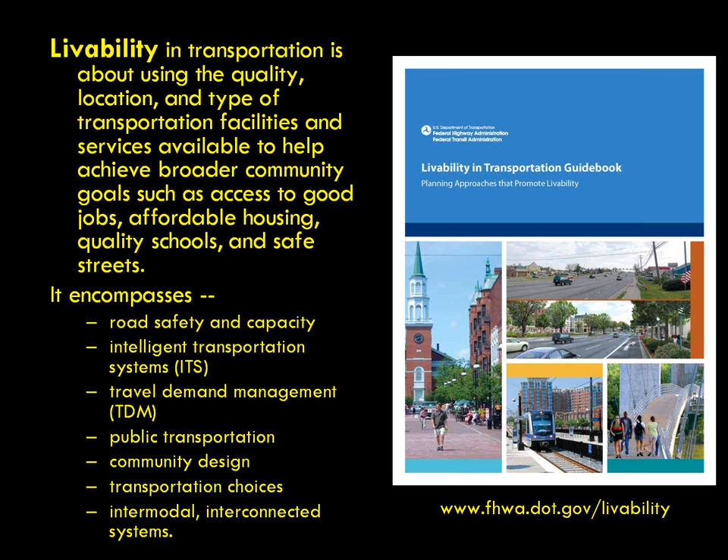This quote is from a guidebook published very recently by Federal Highways that we had a chance to work on along with our consultant partner ICF, to help define and provide case studies and best practices not only for incorporating livability into transportation investments, systems, and plans, but also to address the longer-term issues of sustainability, which, in one definition, you could say is really livability for future generations. This guidebook is just one example of many that are out there being created by transportation-related agencies.

Throughout the administration, many of which are just a sampling seen on your screen, and many of which are being funded by a variety of agencies, including ones that are not coming out of DOT, including EPA and HUD particularly.

I think this is a really golden opportunity for us as planners to integrate our transportation planning, our funding, our sources, our best practices with the larger practice of urban planning, regional planning, rural planning, and really address the whole question of creating communities that people want to live in.

That makes me step back and ask, why do people live in community? What was the purpose of getting together in the first place? I think initially the goal was to survive, and that's still true today. But as our societies have advanced, we also gather in community to thrive.

Transportation needs to help us survive, by providing connections that help us get our basic needs met in a way that supports our health and well-being. But transportation also needs to help us thrive, which has to do with economic well-being, healthy living, and advancing our social, spiritual, and educational goals of life.

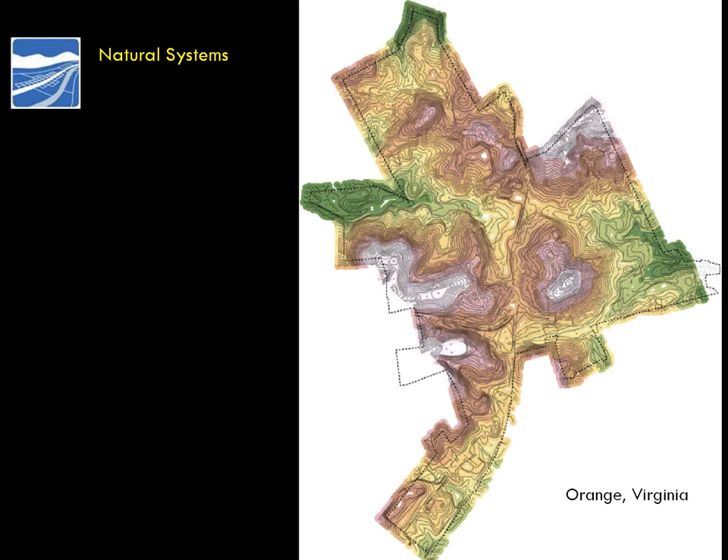Every community is shaped very distinctly by the natural systems, as shown here in the little town of Orange, Virginia, by the transportation systems overlaid over time into canyons, rivers, valleys, and rail lines, and by the settlement patterns that organize themselves around those transportation networks. Where things are most accessible is where development wants to go.

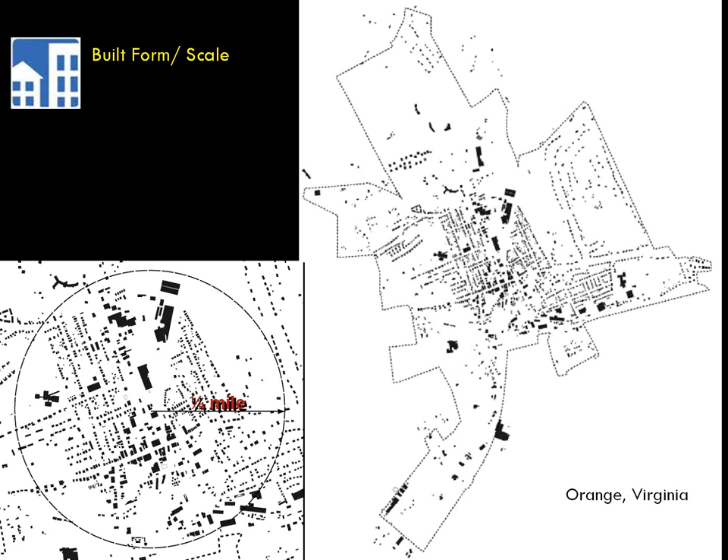In turn, the scale of those streets and networks really dictates the built form. A large framework of large streets and street grids, as Chris will be talking about in a minute, will give you a fairly large-scale community. A small scale of fine-grained streets will give you a much finer-grained scale community, and it will ultimately contribute heavily to the character of that community.

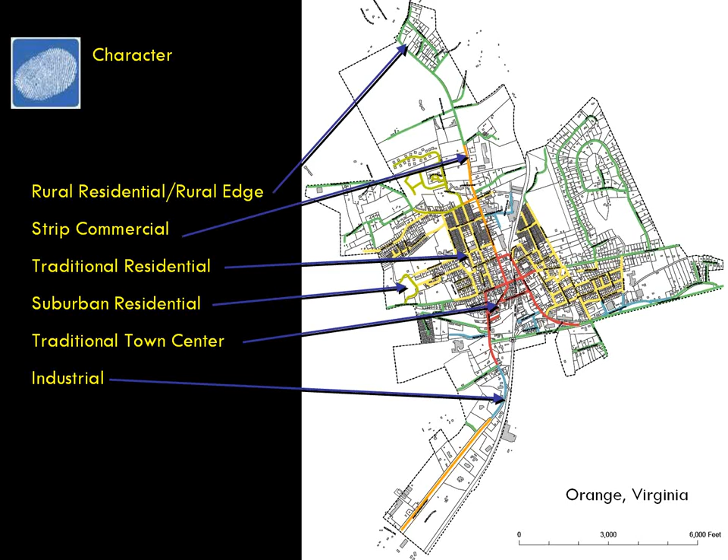You can really see the character of a community changing and evolving very closely in step with the quality, type, and scale of its transportation networks. Chris is going to talk a little bit more about that concept and some of the science behind it, and I'll turn it over to you, Chris, to discuss that further.

I'm going to start by talking about the building blocks of urban places: place types, a hierarchy of place types and street networks, and then corridors. Then I'm going to talk about what we think are the fundamental planning and design goals, which are ensuring that both mode sheds and destinations overlap, and that network continuity is provided at all levels and all scales.

Starting out with place types, just to get this area introduced, these are transect-based place types. I think a lot of people are familiar with them. They go all the way from T1 natural zone up to a T6 urban core downtown zone, with a hierarchy of place types in between the two. There's also special district zones which include warehousing and retail, big box retail, and industrial uses. Next slide.

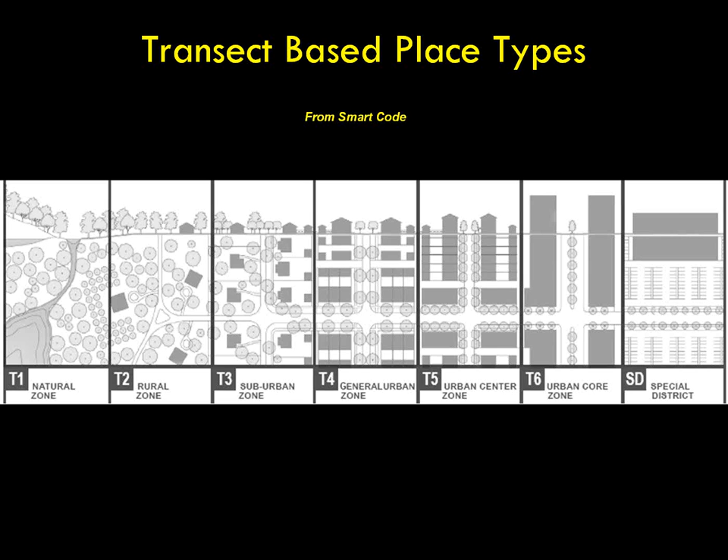These place types are defined in the SMART code. These are some general characteristics of the place types. Next slide.

Hannah, there we go.

What's not clear when you look at the SMART code and Transect information is what are the details of the transportation network that underlie these different place types?

If you look at the SMART code, they talk about pedestrian sheds, which are quarter-mile radius, half-mile in diameter. There's a primary pedestrian shed, and a secondary pedestrian shed that extends another quarter mile to create a mile diameter area. Then there's a third bike shed that's somewhere between 2 and 4 miles in diameter. Those are showing up on your screen as the pink, the dark pink, and the yellow.

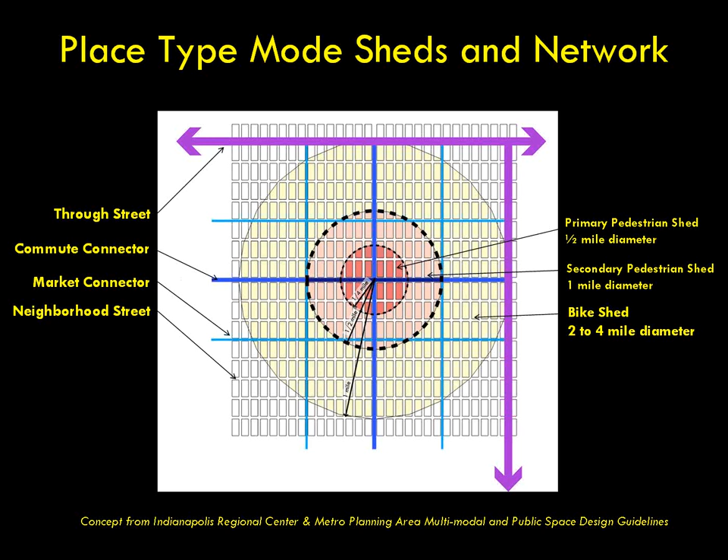There's also a hierarchy of streets that serve differing market areas: through streets for regional and interregional travel, commute connectors to get to work, market connectors to get to local retail, and neighborhood streets that allow you to get through the neighborhood itself.

Just to give you some examples of place types, these are focused on Virginia. This is downtown Richmond. What you're seeing in the aerial photograph is the primary pedestrian shed with that smaller circle, the half-mile diameter walk area. The secondary shed circle surrounds that, the mile in diameter. The circle represents about a square mile in area, and this will be pretty consistent through my presentation. Downtown Richmond is pretty much fully contained within that mile area, with fairly large building footprints, so it's a T6 type of zone.

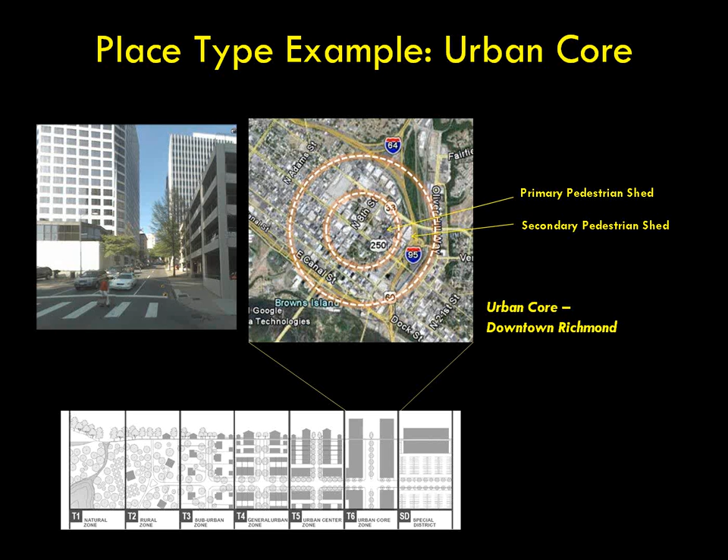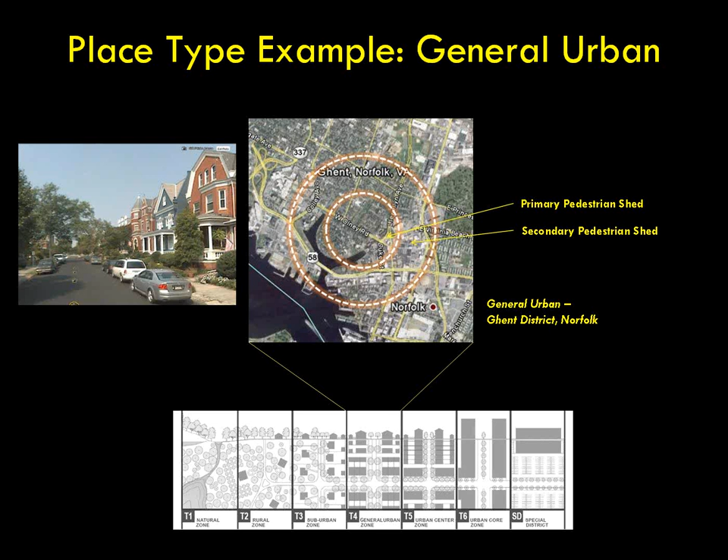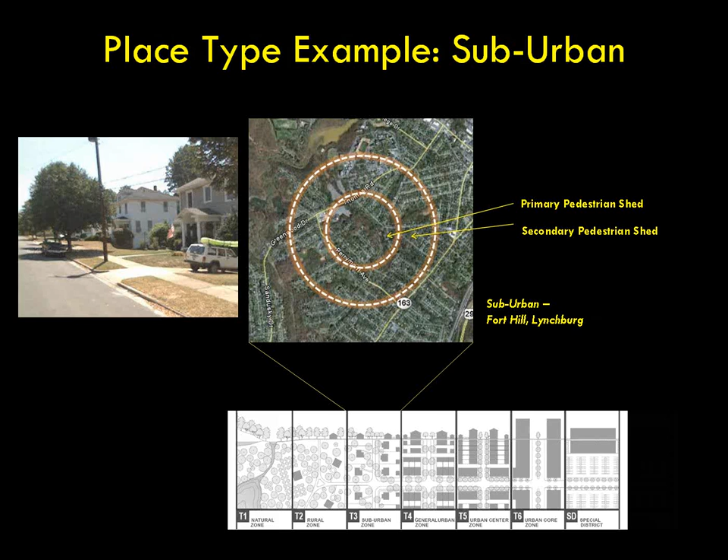The next area is just on the outskirts of Lynchburg, Virginia. What's interesting about this suburban place type, which is T3, is that there's a fairly ubiquitous land form within the entire mile circle. All of the footprints in the aerial photograph, or just about all of them, are single-family residential areas. So if you walk within this area, the destinations would be other houses, but that's typically not what people walk to. So even though these are walkable places in terms of functional walking, it's not the place that provides that.

Glenn would probably recognize this area. It's the Brandywine area of Chesterfield, which is more rural in character, and you can see the flavor of it.

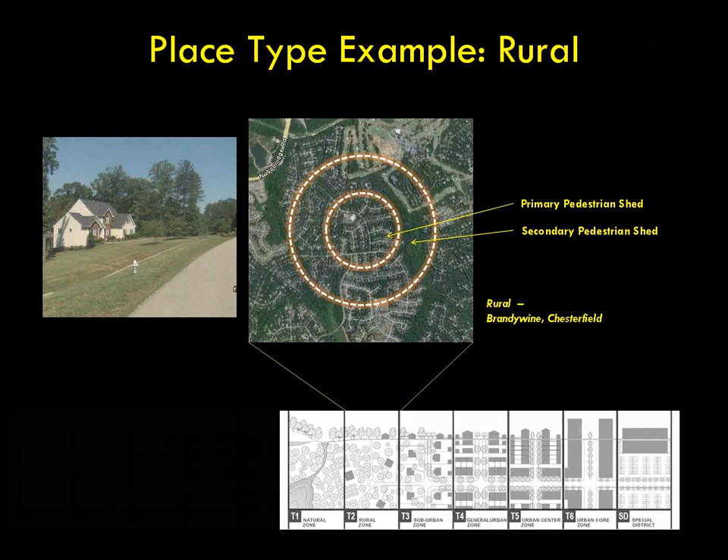The last zone is the Special District Zone. This is a place in Virginia Beach where Lynnhaven Mall is, right off Lynnhaven Road. There's a lot of activity, you can see a lot of footprints within the aerial photograph, a lot of activity within that mile circle. But it's mostly non-residential activity, so not a lot of walking because of the lack of destinations in this area. More importantly, it's not well connected, so it's not as easy as it would appear to get from one front door to the next as you go through this area.

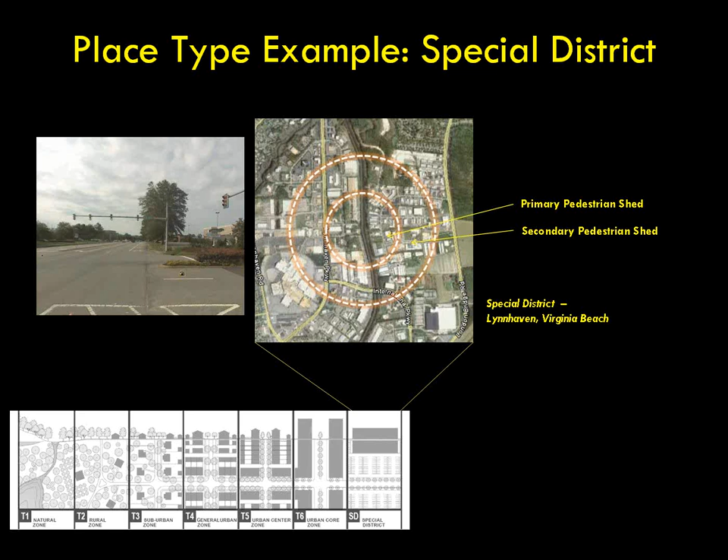Place types and networks are connected, and they form a hierarchy. I want to go through a quick representation of what that hierarchy looks like, starting with travel sheds. If we could get everybody into a very small space, we wouldn't have to travel very far. But the fact is we do spread out over space, and because of that we have different travel sheds that are generally recognizable.

The first is a neighborhood shed, getting to the park or to the school. The next is a market shed, getting to the drugstore or grocery store. The commute shed is typically a little longer because you're getting to work, which tends to be further away. Then there's regional sheds, such as the trip to downtown, or that regional destination. And last is interregional, which is travel among regions in the country.

Walkable neighborhoods are at the base of the hierarchy, and these are all based on a quarter-mile primary walk area that I talked about earlier. They should be connected by a series of streets to form the neighborhood grid.

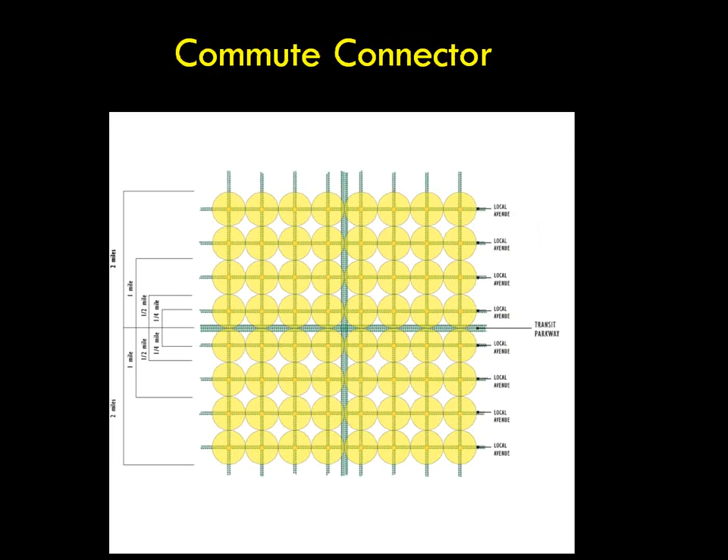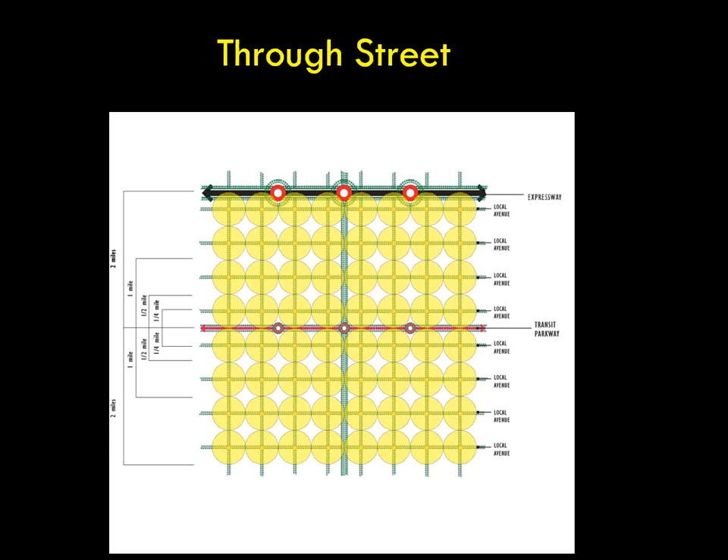The commute connector centers this cluster of neighborhoods together. You can see it's a couple of crossroads, and transit is very appropriate on that. Then you've got the regional access provided by the through street, which is typically an expressway. On top of that, you've got a series of sub-streets, market connectors, that get you to a smaller series of centers.

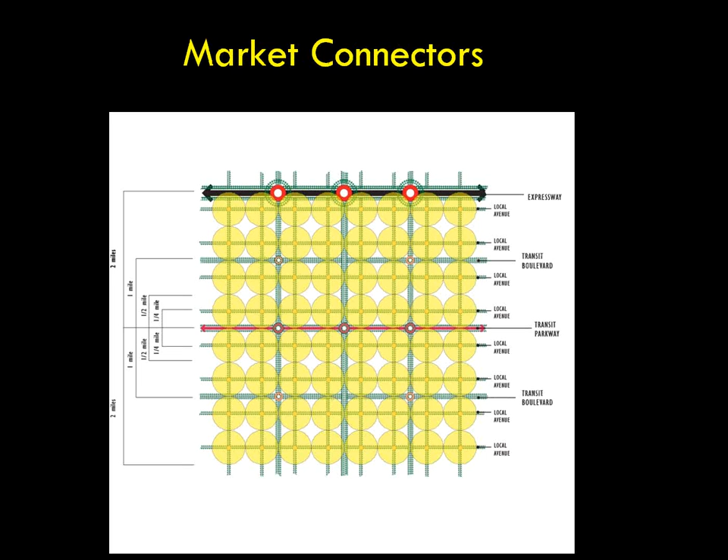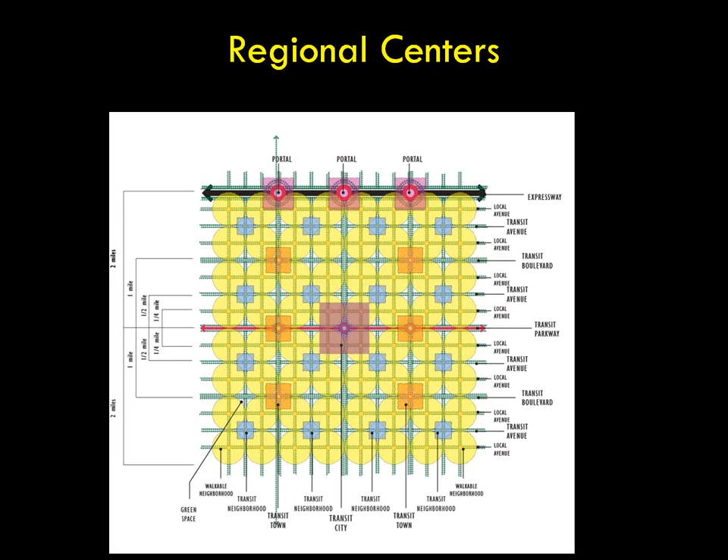The centers start orienting themselves to this network. So at the smallest level, parks and schools are neighborhood centers that serve the neighborhoods directly. Then at the next level, you have town centers, a smaller set of centers. On top of that, you've got the larger center, which is the regional center. You also have portal areas, which provide opportunities for high accessibility because of their location next to expressways.

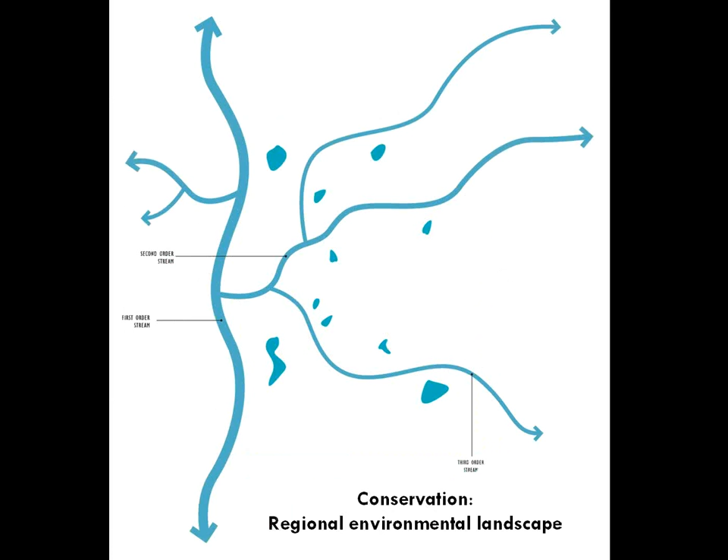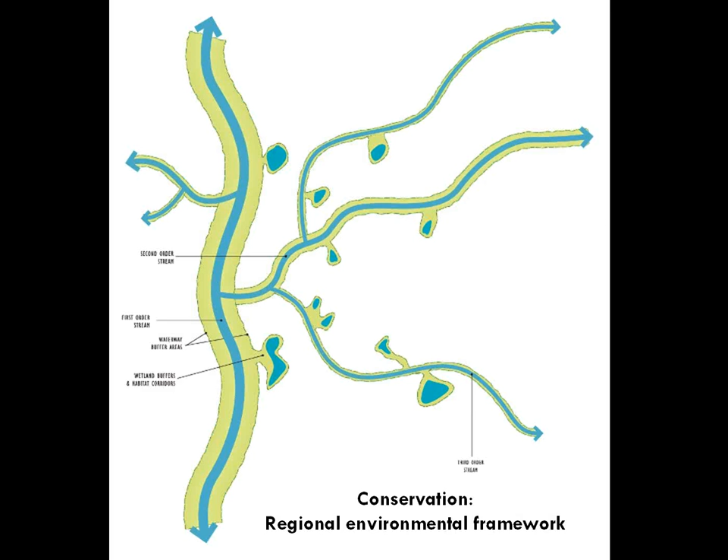One way of understanding how form should fit on this landscape is to put that grid on top of the landform and then start modifying that grid, so that the alignments minimize their impacts to this landscape network.

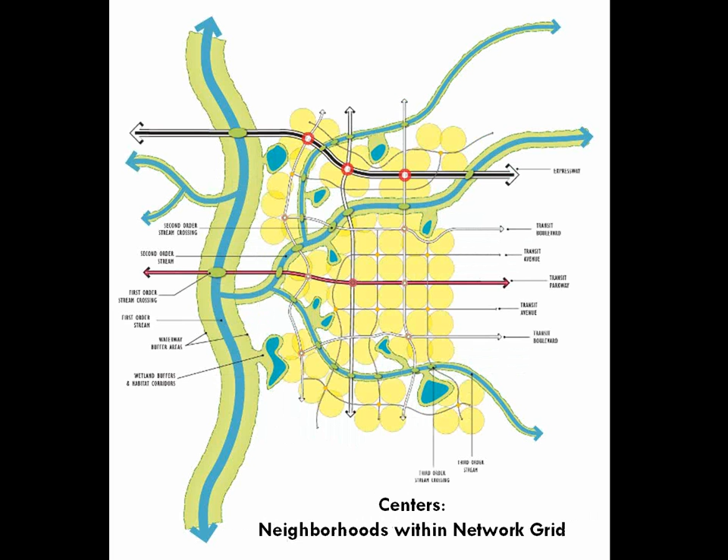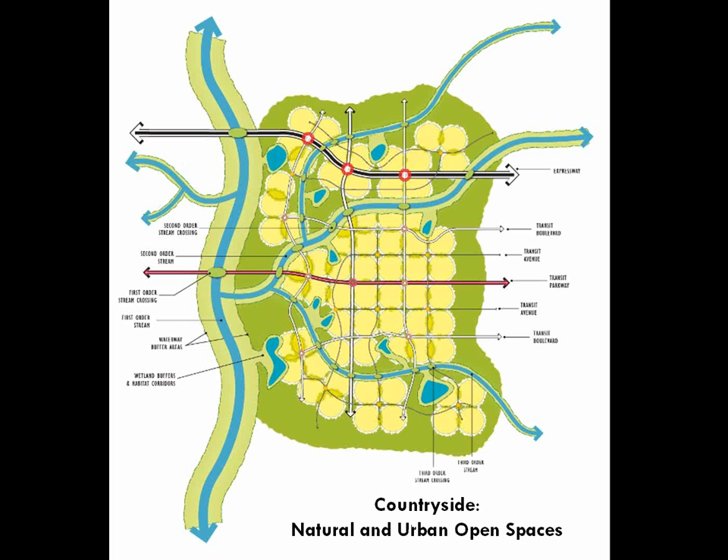Within that framework, that network, come the neighborhoods and those pedestrian sheds. Then the public and green spaces that help frame up and form those urban areas. And then where all those larger streets in the network intersect starts informing you in terms of where the center should take place.

And then lastly, corridors. Corridors are places where there is a lot of high-intensity travel taking place. There's also a lot of high-intensity development that's usually taking place.

In the Transect diagram itself, there's an implication of corridors. You can see in the top diagram that Transect diagram we started with, with the different place types. What you're seeing on the bottom is just a network representation of the same thing, adding some detail about how the network should form up around these transect zones. So there's a direct correlation between the top graphic and the bottom graphic.

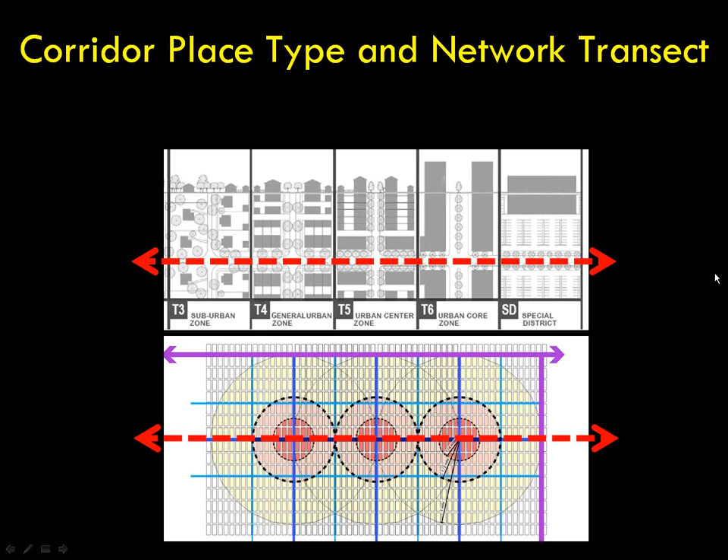The transect, as it implies, goes from fairly high density in the downtown area and transitions into lower densities. The transition, though, isn't always smooth—there's typically subcenters within larger areas where there is some additional density.

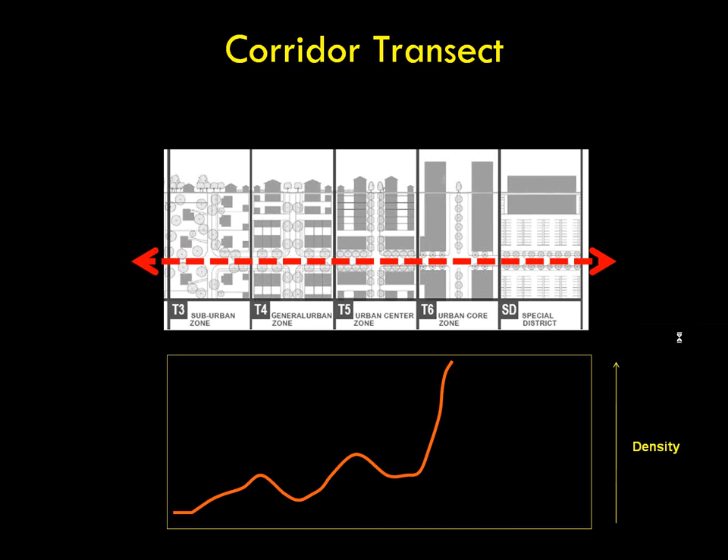And the way corridors get put together can be very different. So, Hannah, where are you here? Next slide, please. Hello? Sorry, it's a little stuck. Not sure why. There we go. All right, okay, yeah, I've got it.

So what I'm showing is a series of differing corridor types, and they're all predicated on these circles—the outer edges represent a mile diameter. We're going to be looking at a series of places using three circles joined together, so it's about a 3x1 mile area that we're looking at.

There's another form of corridor. This is actually in Arlington, Virginia, just on the other side of the Potomac River from downtown Washington, D.C. Arlington is organized, at least this corridor is organized, along the Orange Line, Metro Orange Line coming out of Washington, D.C. And what you see within that 3-mile area is a lot of intensity right along the Orange Line stations.

But unlike Washington, D.C., the big building footprints, as you get further away from the stations, start dropping off into fairly low intensities. But right in that primary pedestrian shed area, the inner circle, there are very high densities within this corridor, so it would be a high-intensity, transit-oriented development corridor. Next slide.

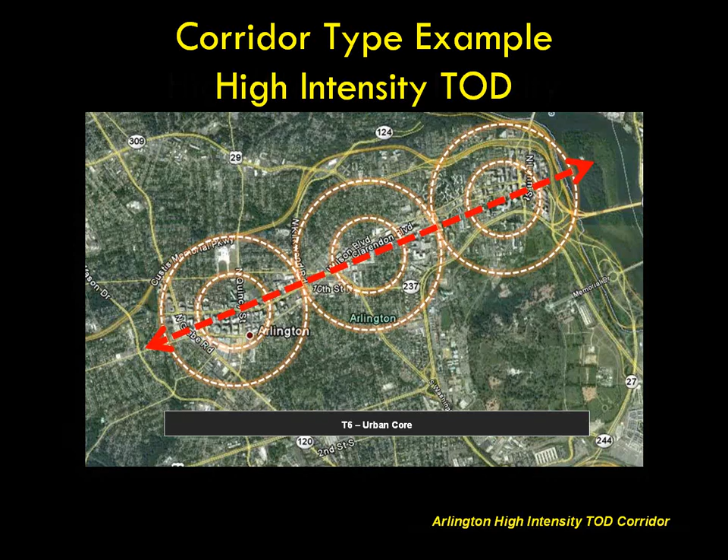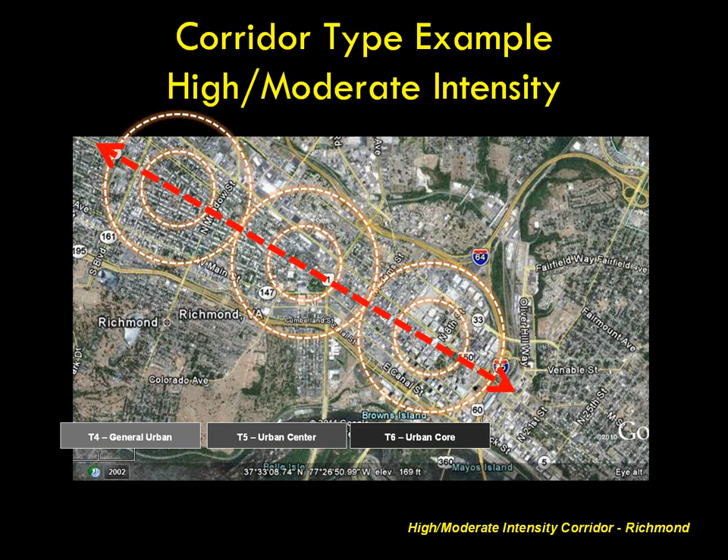And then the middle circle is an urban center. The densities get a little bit lower here. Virginia Commonwealth University is located in this area. Some of the museums in Richmond are located in this area. It's a little bit more residential in flavor, but still a pretty good mix between residential and non-residential. The densities, as I said, drop off. And then when you get to the next circle to the northwest, the upper left, it becomes much more residential in character. It's the Fan District. But it's still got very good bones and very good urban structure to it. Next slide.

So that's an idea of the different flavors of corridors and how they can be organized, and there's a lot of variations to corridors and how they're put together. What I want to do is start shifting into planning and design goals, and the first one I want to talk about is creating mode shed and destination overlap. Next slide.

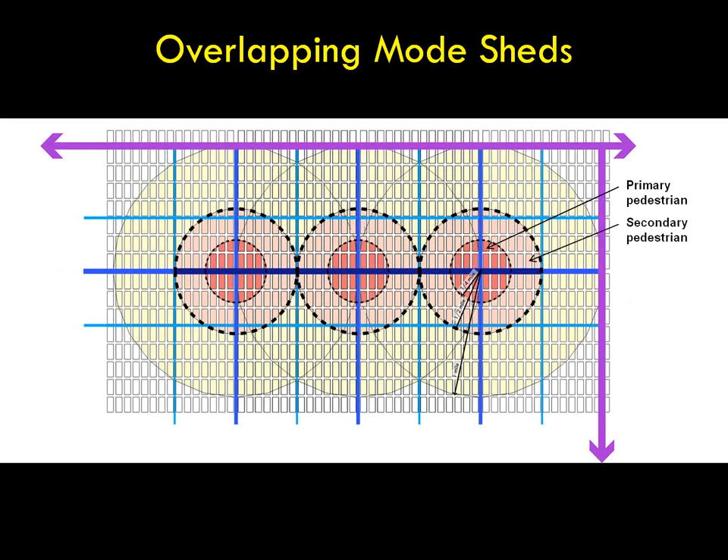Again, using that same diagram that we've been looking at - the primary pedestrian shed in the dark pink, and in the lighter pink, the secondary pedestrian bike shed. And then what's being superimposed on top of all this is the transit shed. The transit shed is formed primarily by what's accessible from the transit stations, and you want to minimize accessibility to transit stations by automobiles because it introduces a transfer which is a real impediment to travel.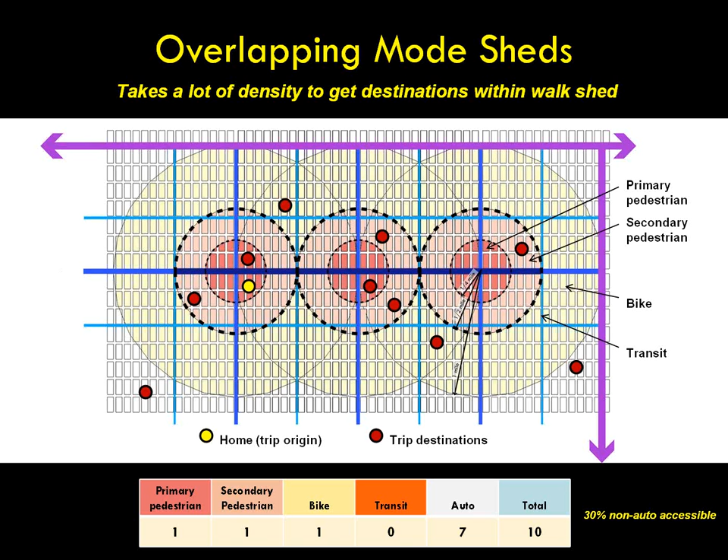Now let's say it's a year later and they're trying to make the same trip. The restaurants are in the same spot, but now the jurisdiction has built a nice light rail system with a stop real close to their house. They still have the 3 restaurants within walking and biking distance, but now if they get on transit and go to the next station up to the right, there's 3 more restaurants within walking distance of that station. And if they go further east to the next station, there's yet another restaurant within walking distance. So now they've got 4 additional destinations accessible by non-auto mode.

Only 3 of the 10 destinations required them to get in the car. So you can see the richness of their destinations has increased significantly by adding this transit system for them to take.

I just want to base this more in reality, Chris, because if a community could build this in one year, we'd be living on another planet. However, in the 30 years it took them to build that, the couple aged to the point where they need transit, and it's there for them. So there you go—they can age in place.

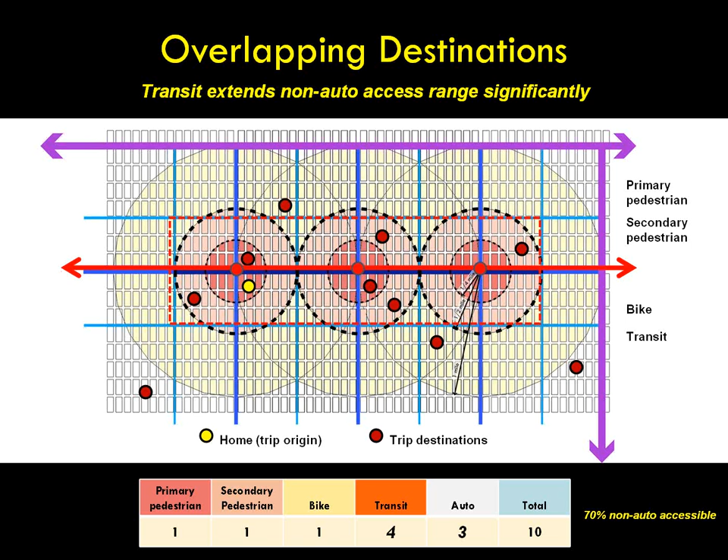Let's assume, rather than it took them more than a year, that instead of putting that transit alignment along the blue corridor near their house, they put the transit alignment up in the regional through corridor.

Same station spacing as in the previous example, but because the transit station is so far away from the house, it would be hard to walk from the house up to the station. It would take a lot of time just to get to the next station and back down to the restaurant. So basically this transit alignment has done them and the restaurants absolutely no good in terms of non-auto travel. They're back where they started in terms of their non-auto accessibility.

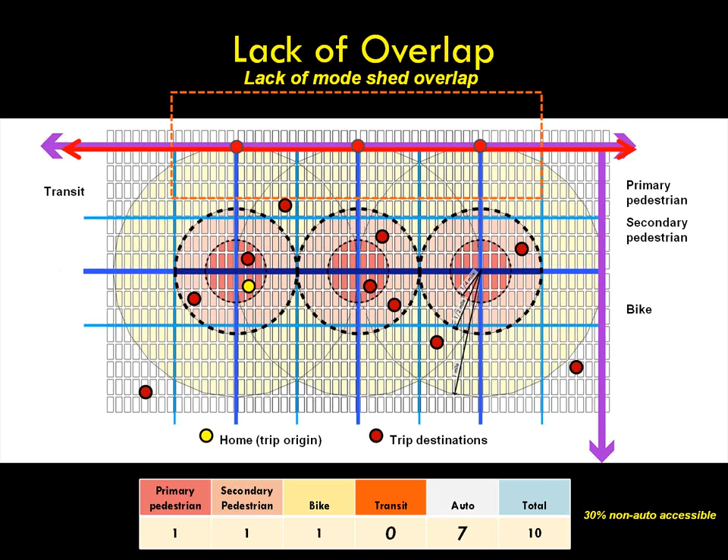For the last example in this series, let's assume the local land use codes don't support putting a lot of intensity and density in around these stations and in pedestrian areas.

The bottom line is you want to create as much overlap in terms of your mode sheds and your destinations as you possibly can. This is where the 4 Ds really come into play: density, diversity, design, and destinations.

This is how it all comes together. If you can get all these things together, there's evidence out there that there's a lot of synergy in the overlap, and you get a great big boost in the amount of non-auto travel when you can get these things to overlap properly.

The importance of continuity is the second major goal that I want to go through.

Back to that same diagram—if you remember, there are different market sheds, and different transportation facilities that serve those market sheds. The purple lines are the through streets or regional streets serving that regional, interregional market. The commute streets are in the darker blue, providing connectivity within the corridor on a shorter travel scale. The even smaller streets provide access to more localized markets, and the white streets are the local streets.

Transit also operates in that fashion, where you've got commute transit—typically some sort of premium transit, at least fixed bus route transit—and then shuttle transit service is typically provided for the more localized markets.

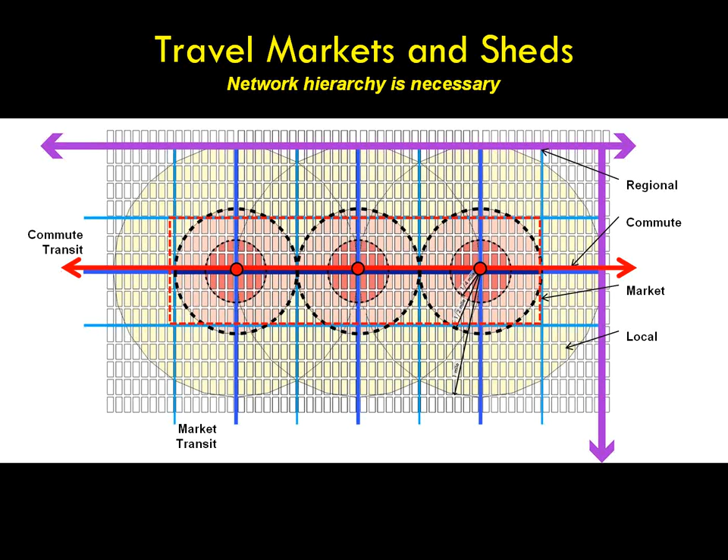This is back to downtown Richmond and that Transect in Richmond, a fascinating place—I used to live there and loved it because of its livability. You can see the 3 circles of pedestrian sheds, and what's interesting about Richmond is the major through streets, I-95 and I-64, form an edge of the pedestrian area rather than bisecting these places. They help shape these places.

In the lighter blue streets shown on the map, you see a very connected network of higher level market and commute shed streets that provide more localized access into this area. You can sort of see the pattern in the aerial photograph—there are yet the local streets that provide a strong complement to the larger connector streets going through this area. So there's a lot of easy, well-fitting continuity provided by the entire network through this particular area.

The red line that you see on the map is a proposed bus rapid transit alignment that's going to go along Broad Street. You can see it was easy to superimpose that into this particular fabric and network because it was connected together properly. So the continuity happens at all levels: the local level, the market street level, the commute street level, as well as the connector street, the through street level.

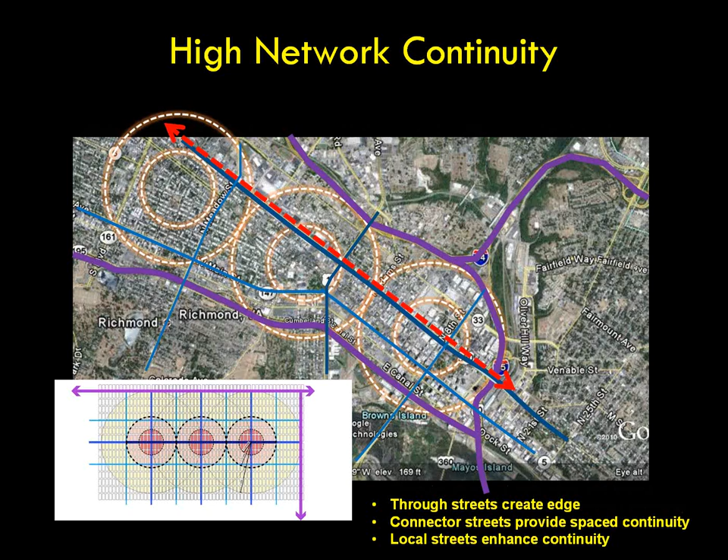The next place is, I think, most people are familiar with it. If you're not, it's an interesting area. It's called Tyson's Corner. It's up in the Washington D.C. area, in the suburbs, right off of 495.

Just looking at it, the initial impression is that you've got the through streets in purple that provide the edges. There's one through street that kind of bisects this place. But when you get down below the through street level, the network connectivity at the commute level and the market level is gone. There's a series of streets that kind of flow through here, but there's no pattern to them, no spacing like you saw in Richmond. Even more damaging for the connectivity of this place is the local grid—there is no local grid that helps support the connector streets. So the pedestrian sheds, at the same scale as downtown Richmond, are not as evident because of the patterns, because of the lack of network connectivity.

What they're proposing to do in this particular area is extend the metro line. The silver line will come through this area, and it's been somewhat of a challenge for them to get that alignment through here. It's going to happen, and when it does, it's going to improve this area quite a bit. But they've had to go in and redesign this area to try to make it more walkable, with more network continuity and more overlap of the mode sheds and destinations—in other words, to get this formed up to provide all the things we've been talking about.

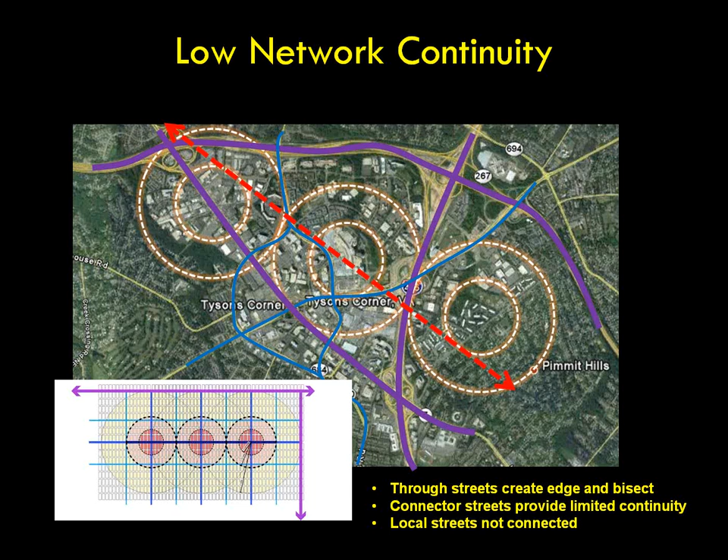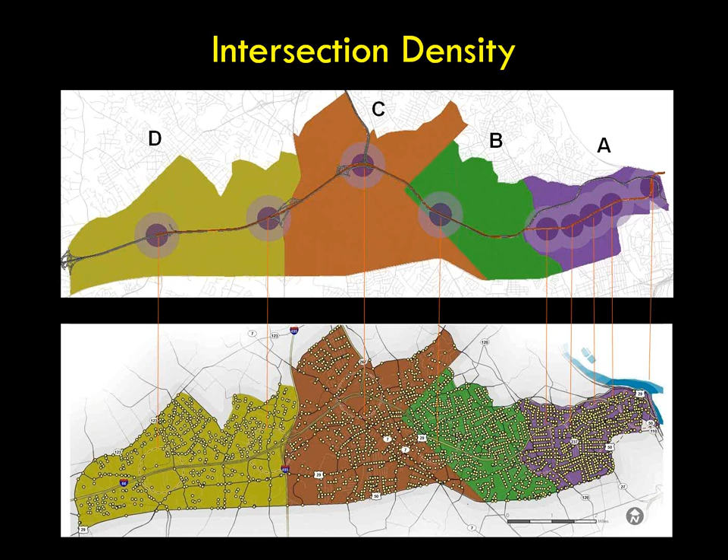The other thing I notice is that there are very few intersections within the station areas as you get out into the suburban areas, and where you do have intersections, they're outside of that circle. You'll see that in more detail in the next slide, which is a representation of the intersection densities, just to give you a sense of how that works out in terms of quantifying the network.

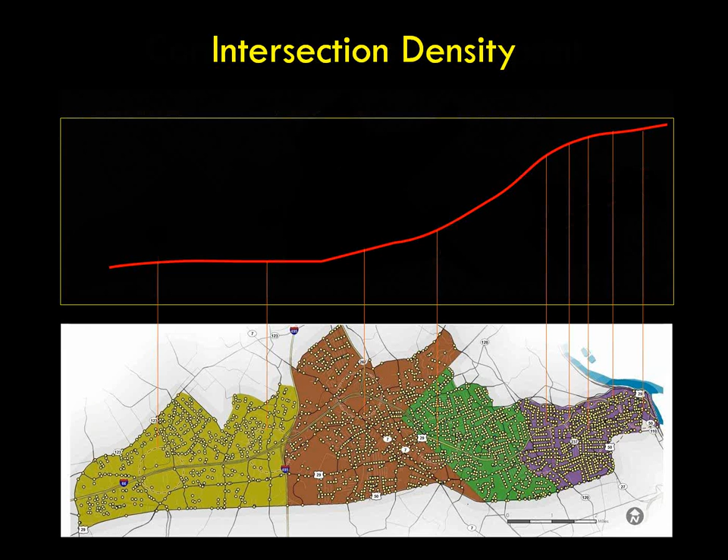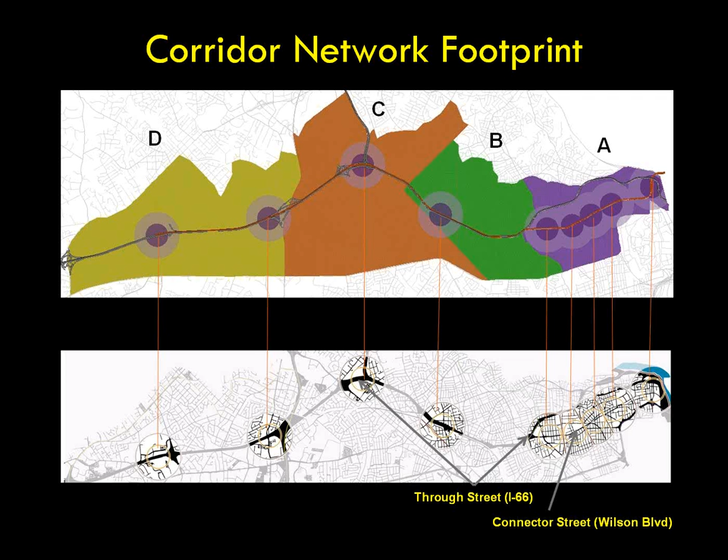Much like 95 and 64 did for the Fan District in Richmond, Virginia. If you look at the station areas, there's that real fine grid within them. Then when you get out to the Fairfax stations, you can see the big footprint imposed by I-66, which consumes quite a bit of land that could be used for destinations but can't be because the street footprint is so big. The network around the stations and around I-66 itself is not as well connected, so you lose quite a bit of connectivity compared to the station areas in Arlington.

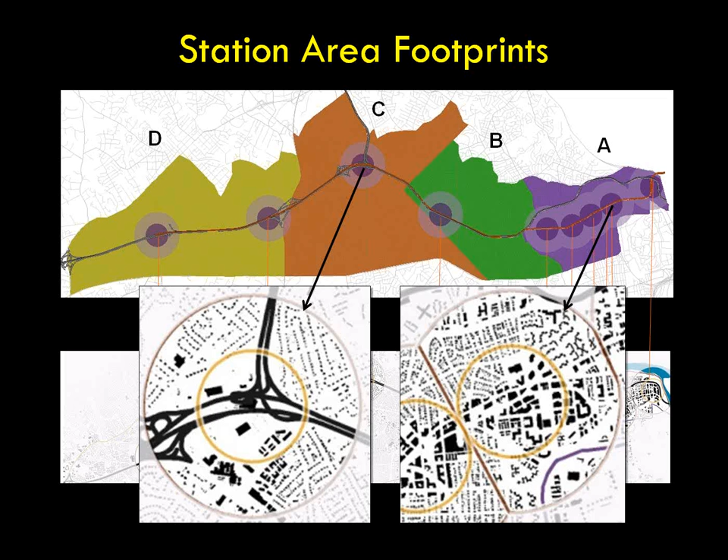So if you really want to fundamentally change travel patterns and provide travel choices, you need to think about the overlapping mode footprints as well as destinations.

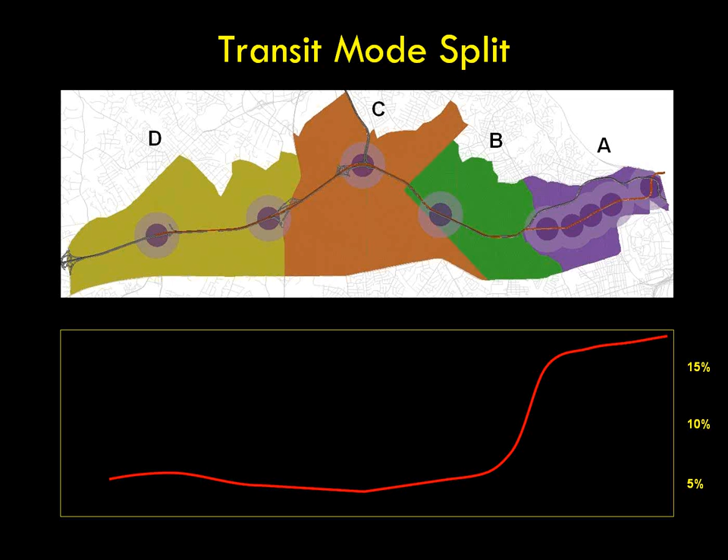And do those zones correlate to the T1, T2, and so forth Transect zones? Yes, they certainly could. So that's an overview of that relationship between land use and transportation.

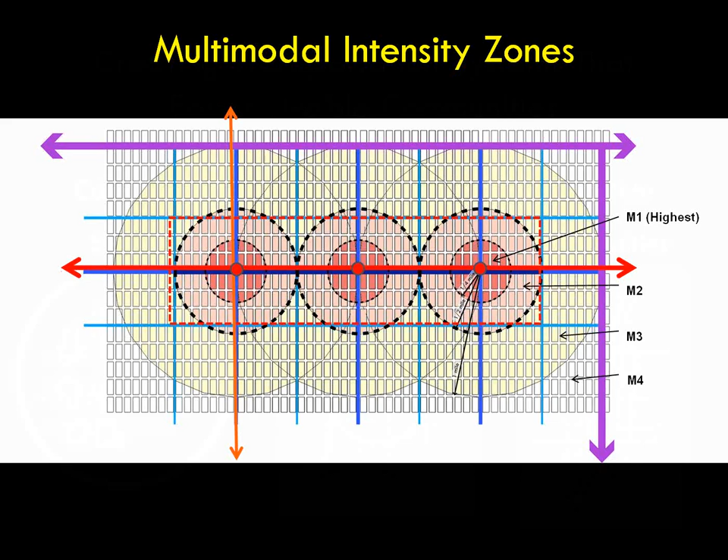I'm going to bring it back to that framework, fabric, and fingerprint concept. As we design our streets and corridor networks, keep in mind that a corridor isn't just a street or a transit line, it's a network through a swath of area that is an activity center or a zone or a place. By linking up our streets and corridors properly, we can set the stage for good, complete communities.

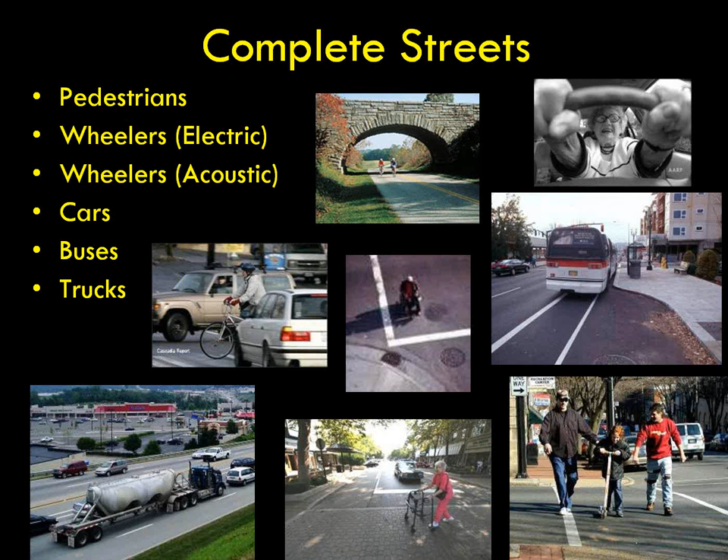Most of you have probably heard of complete streets. It's a concept that's been around for a while, and basically it's advocating making your street network accessible to all types of users. But it doesn't mean every single street is accessible to every single user. It's really more about thinking of the corridors as a whole, the corridor networks as a whole.

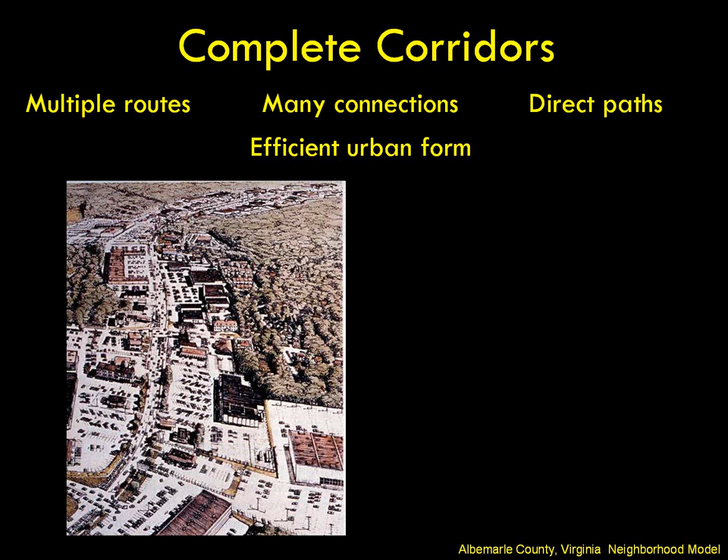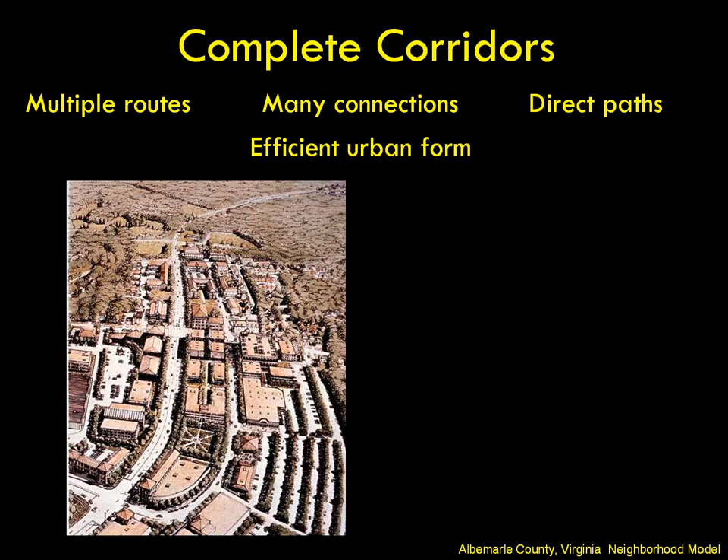Take a place like the one showing on your screen now, as it was today or a couple years ago, along a major highway in Albemarle County, Virginia, with big box development. Their vision is for creating more of a grid network at a suburban scale that allows the major street to be that edge, that through street, and begins to orient development into the activity center to create a place bounded by the larger high mobility street, so that both freight and larger mobility travel has a place to go, but you also have a network that supports the kind of community you want in the future. It's about understanding the completeness of the entire network.

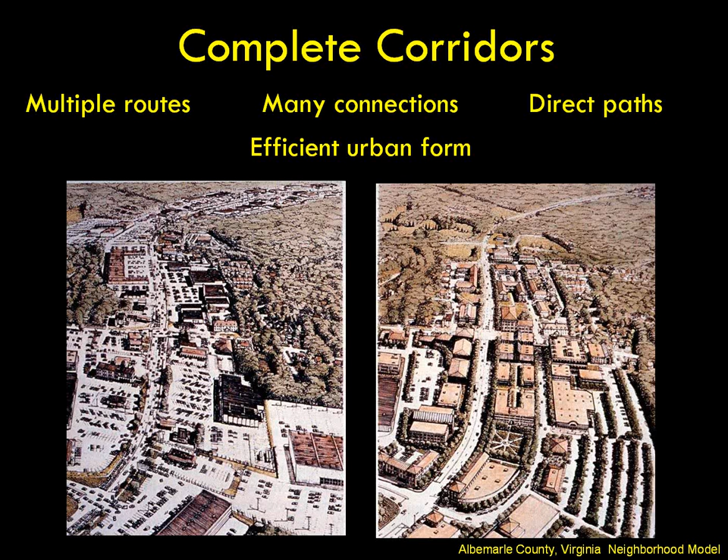So it's really balancing having your higher speed streets, your higher speed transit options that provide mobility, with your decisions to locate activities in higher levels of intensity and mix, and supplementing that proximity of activities with the accessibility within that place where you've got those activities going on.

It's not enough just to put a transit station in if it's not in the right spot within your land use pattern, and it's not enough just to put a lot of density in if you haven't created a place that's easy to walk door to door for all types of people. It's really a matter of finding a balance between all three levels of design in order to make a community work with a good, complete framework.

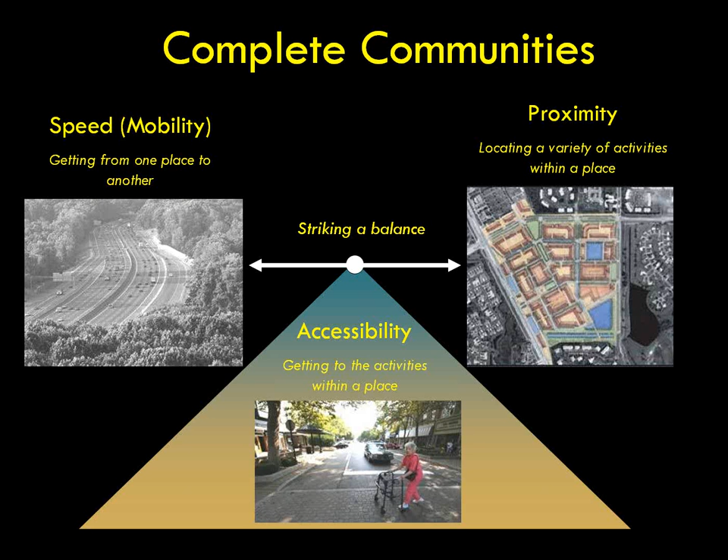I sometimes think about it like designing a home, and I've thought a lot about barrier-free homes in the last few years. You need the speed to move around your house, to get from one room to the next easily, from your dining room to your kitchen. Once you get to your kitchen, you want the right things in the right proximity to one another - the food relatively near the place where you're going to cook it. And then once your things are there and you've gotten to that room, you want to be able to actually access the objects and things you're trying to get to in a way that works for you.

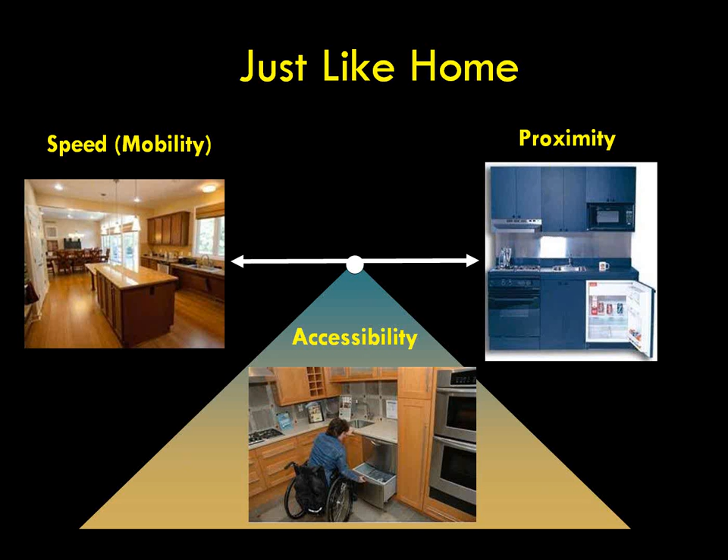So designing a community perhaps isn't that different from designing a house, and it's helpful to think about the kinds of people that are going to be using that community, just like you would if you were designing a home. One of the strategies, interestingly, that has evolved out of architecture, planning, and engineering - particularly architecture and engineering - is this concept of context-sensitive solutions.

I'm going to walk through very briefly now to wrap up these concepts behind this approach. I have found it very helpful, and I've used this particular book a lot in some of my work with corridors and communities.

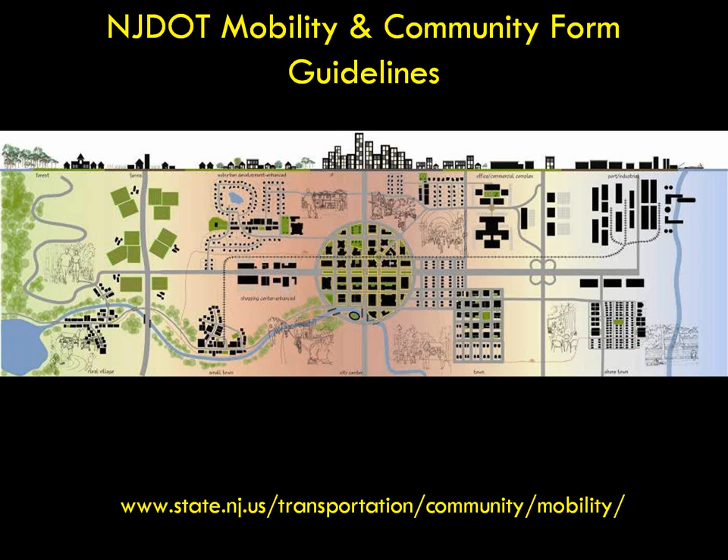These concepts have been reflected in a fair number now of guidelines and resources, for instance, New Jersey DOT's Mobility and Community Form Guidelines, and that graphic ought to look familiar to y'all. That's another adaptation of that very helpful Transect concept.

Pennsylvania Department of Transportation has worked alongside New Jersey DOT with their own program, and many other state departments of transportation and federal agencies and local communities are beginning to use this sort of structured approach to designing the street and the built environment together, so that you get the framework and the fabric that creates the kind of community you want. The approach really comes down to a three-phase process.

One is deciding what is the purpose of the given street or corridor or network you're trying to plan for. Some of the terminology that goes into defining the purpose is the context zone, similar to transect zones, within which your study area is. What are the types of thoroughfares you're really going to be planning for? What needs to move through this kind of place that you're creating? Is it trucks, bicycles, people walking? And then what are the appropriate functional classifications of the corridors there?

Once you've identified those, you can then begin to talk about scale, because the design speed, particularly of the vehicle you're assuming is going to be using the corridor most frequently, really drives everything else, literally and figuratively. So making good decisions about the right scale of each street type, and street within the place you're planning, is really critical.

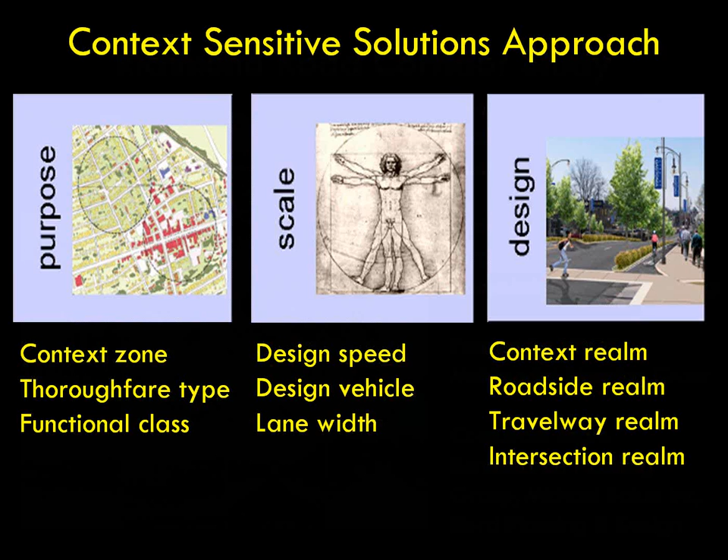I'm going to walk through one little case study of a project I finished about a year and a half, two years ago now, and I'm pleased because it seems to be getting implemented—it's kind of exciting to see it happen. This is a small community in Central Virginia in the mountains of the Blue Ridge, the little city of Staunton, a historic city that's just 3 miles from an interstate exchange.

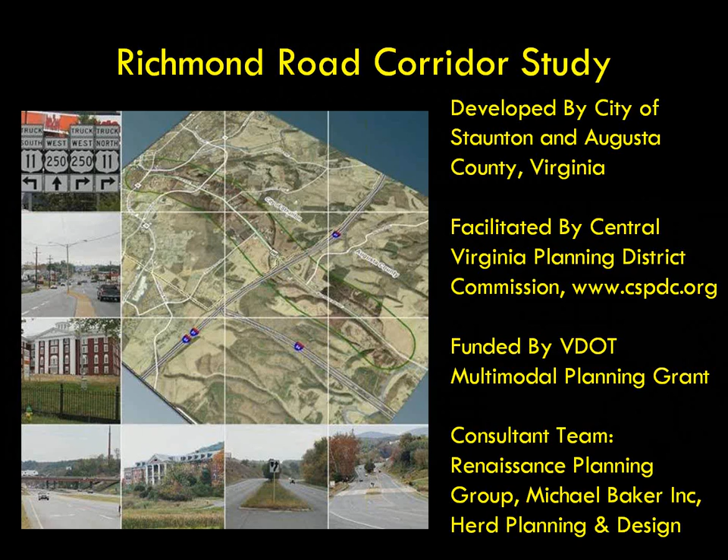They wanted to design a corridor plan that was going to really improve both the community character and provide the kinds of transportation choices that express the livable community goals we've been talking about throughout this whole seminar.

So the recommendations out of this planning process, using the context-sensitive solutions approach to help structure it, encompassed a lot of what we're talking about—both putting in multimodal improvements and looking at character enhancements. One of the most important elements was understanding that Richmond Road corridor...

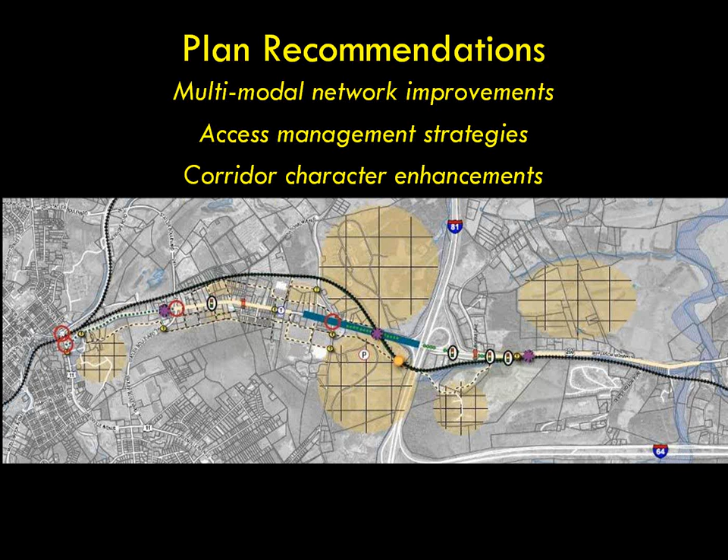which is the white road running through the very center of your screen, is a corridor surrounded by a network of other streets that combined really makes your corridor—all of those streets, whether they exist today or not, really exist to make the entire corridor function properly. So we identified several context zones just within this.

It's a pretty short stretch of roadway, but it really does change context very quickly, from a very historic urban center at the western end, where you can see the Villages and city of Staunton, all the way to the big box and interstate area, and even further out into a rural section. All of this takes place within just a few miles, and it's important to design the street and surrounding environment in a way that supports the kinds of environments the community wants to promote.

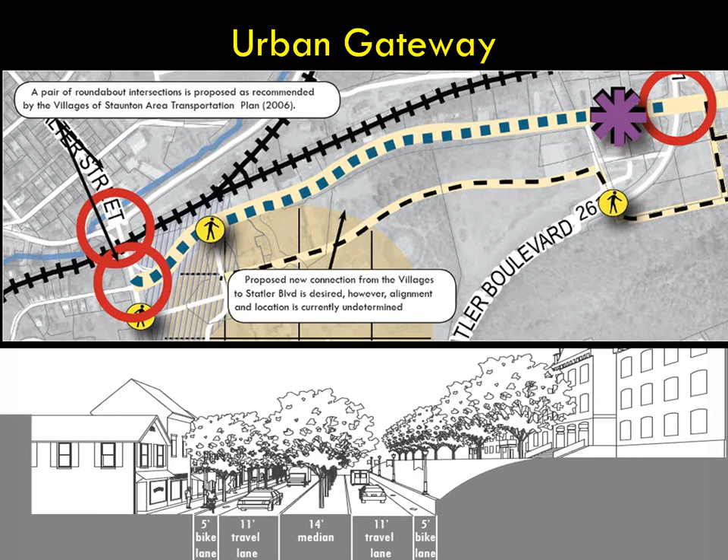So down in that urban gateway section, we really focused on having pedestrians accessing the corridor, making the corridor really part of the urban fabric. Then as we moved towards a slightly less intense urban environment, more of a local shopping and neighborhood area...

we found there was a real need to fill in the street grid around the corridor. It doesn't have to be the same intensity as the urban center, but it does need more logic and connectivity to it. By doing so, we can begin to improve the functionality of the main street by removing some of the traffic lights that are causing congestion and backups, and creating an opportunity for transit.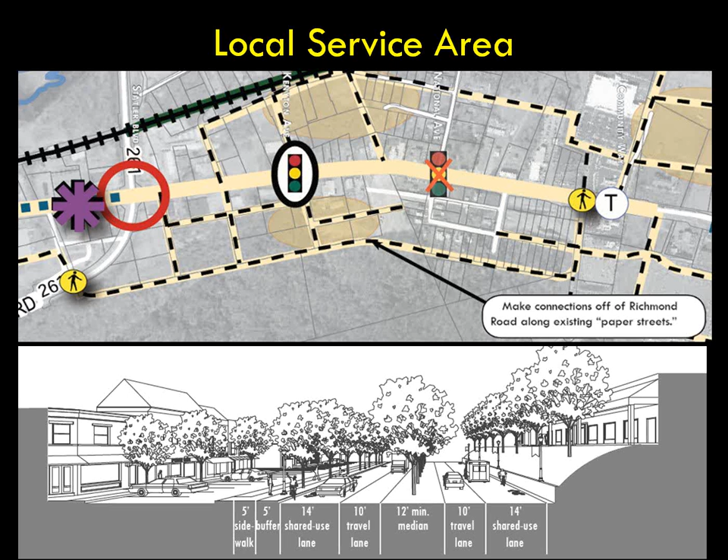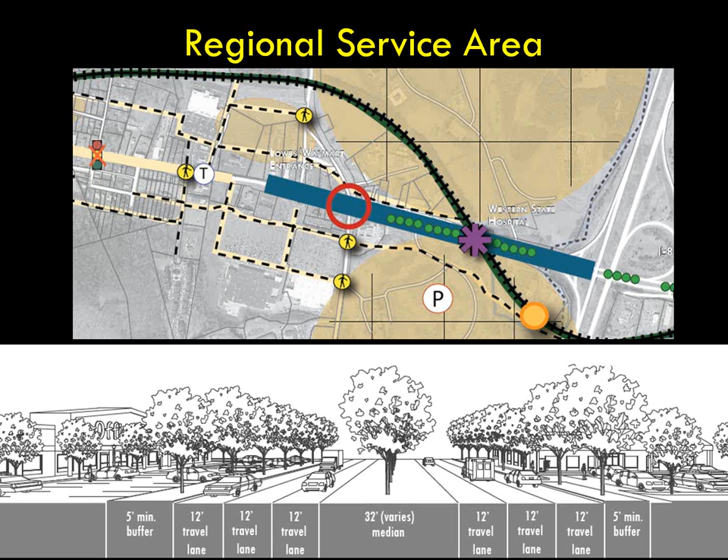As we get into the more regional service area, the big box areas, we're beginning to approach the interstate, as you can see in this picture. The traffic starts to want to move a little more quickly. It's serving a different context, and we found the need to begin to pull the pedestrians and bicyclists even more fully onto that network until you got to the area where it was fully intersected with the interstate.

At that point, you really don't want to have bicyclists and pedestrians—that's one place where the complete street does not involve having bicyclists and pedestrians on the corridor. Fortunately, this area already had a through street constructed privately underneath the interstate that served very well as a bicycle and pedestrian connector.

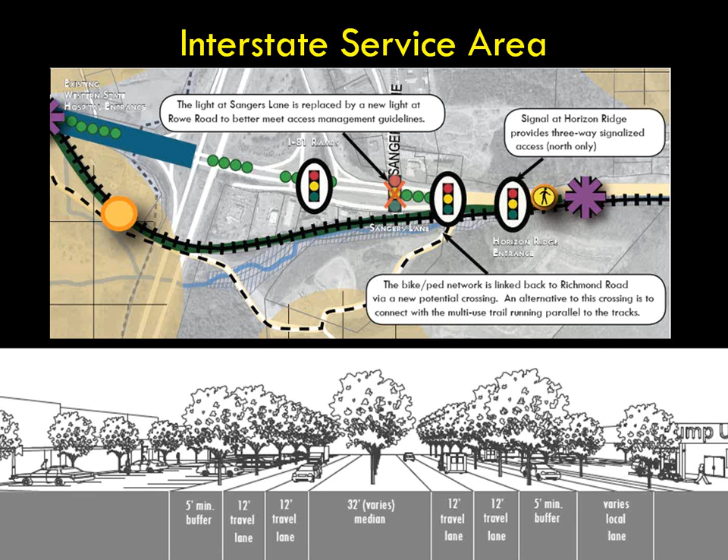But it really was a good planning exercise and process to understand the overlay and the connections, the overlaps between the different networks and mode sheds, just as Chris was talking about in real life here. And then the corridor winds up becoming much more of a rural parkway at its other end.

Two of the things that this plan really relied upon, in addition to looking at the engineering of the main street itself, was making sure that over time the surrounding bicycle, pedestrian, and local street network were built properly. One opportunity they're exploring is putting a greenway adjacent to a rail line.

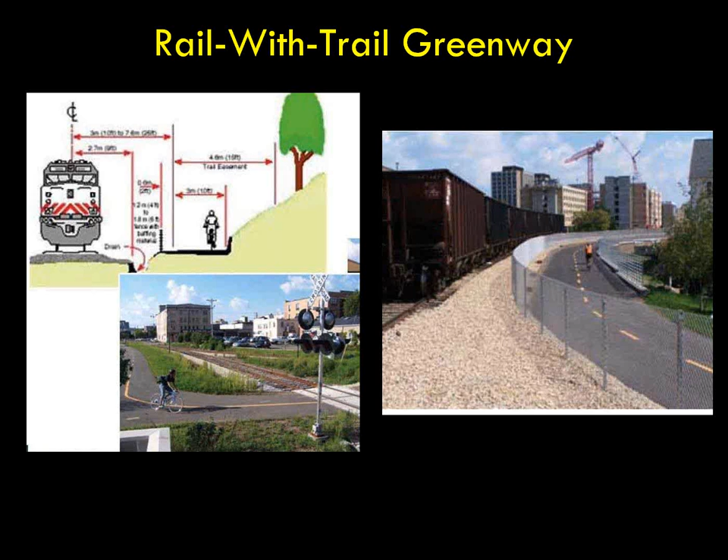That's a very hilly, mountainous area, and those 3% grades are terrific. This is a strategy that's quite doable. It hasn't been done very often in Virginia, but it's been done in other places—putting in a greenway right next to a rail line with appropriate separation of the two modes.

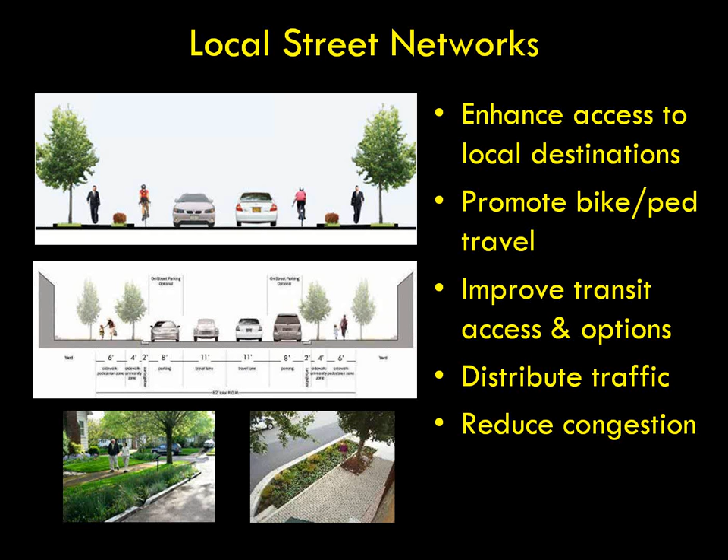The other thing the plan relies on very heavily was creating those local street networks, in order to not only create a corridor that was really complete, but also to reduce congestion and distribute the traffic on the existing main corridor, which is constrained by right-of-way. It really can't be widened, and you don't want to widen it in terms of community character, yet you want traffic to flow more smoothly.

One of the other benefits that this local street network being built over time produces is the opportunity to manage access. These little green dots you see on your screen along the main corridor are all little driveways in and out, in and out, along the corridor—tons of them up and down that corridor causing all kinds of little backups and issues that combined can really create delay.

Over time, as those streets get constructed in collaboration with the private sector, redevelopment can occur. The entrances can begin to move towards the back in many cases, and the driveways can start to be closed so that you have better managed access along the main corridor.

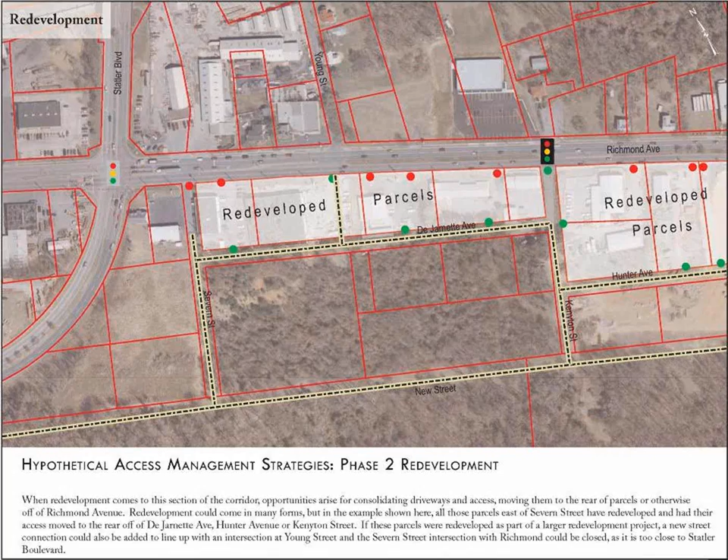So we're really meeting both the transportation functionality goal of the main highway and the community character and development and economic development goals of the community, by partnering on creating street networks and multimodal networks that put it all together and make it all work.

By using that multimodal approach to integrated land use, it also allowed us to get more creative about funding sources, given that the federal and state departments of transportation are not feeling very wealthy these days—really looking for creative ways to use little-known programs and other sources to fund some of these transportation investments.

And finally, to integrate the directives that matter into the policy and regulatory tools of the community, they do have an overlay district established for this corridor as well as their other entrance corridors.

They were able to take some of these context-sensitive solutions design concepts and incorporate them right into the code of the overlay district adopted by the community, and now these design guidelines are in fact part of that ordinance and are being used to help guide development.

And what you're seeing here on your screen is just a very organized system of design guidelines that's structured right around those realms that I showed you earlier of the context-sensitive solutions approach.

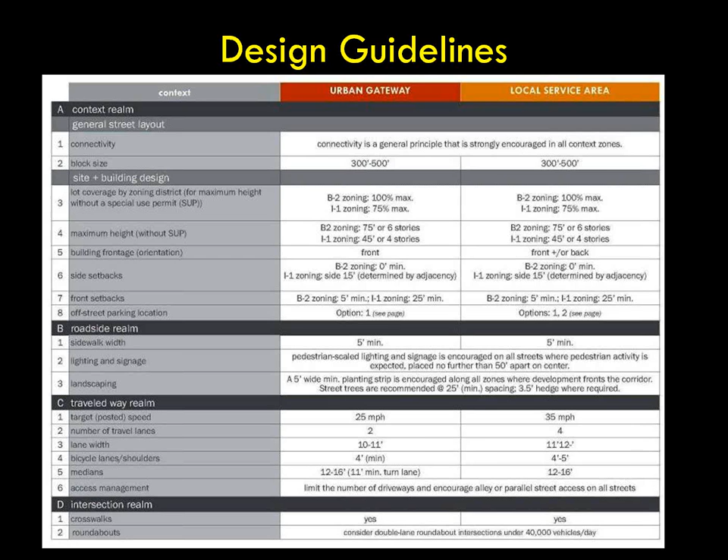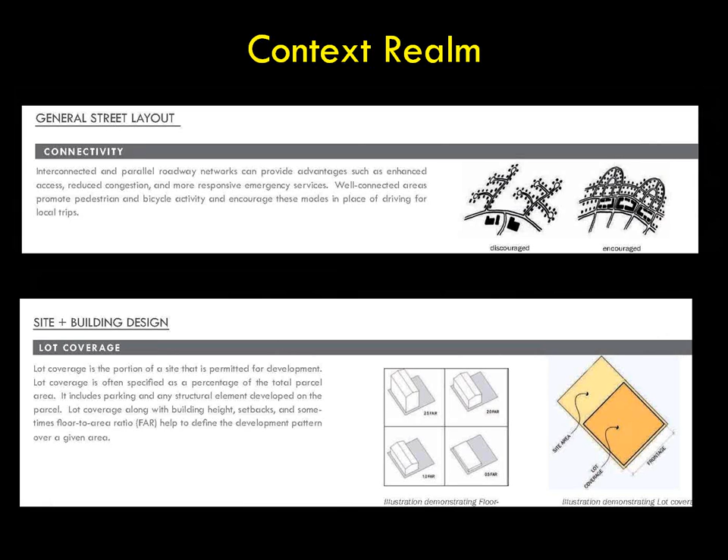Looking first at the four realms, the first one being the context realm, which really looks at the area surrounding the street itself, the connectivity of the network surrounding the main corridor, creating a multimodal network around that corridor, and having the scale of the buildings be appropriate, putting the parking in the right places.

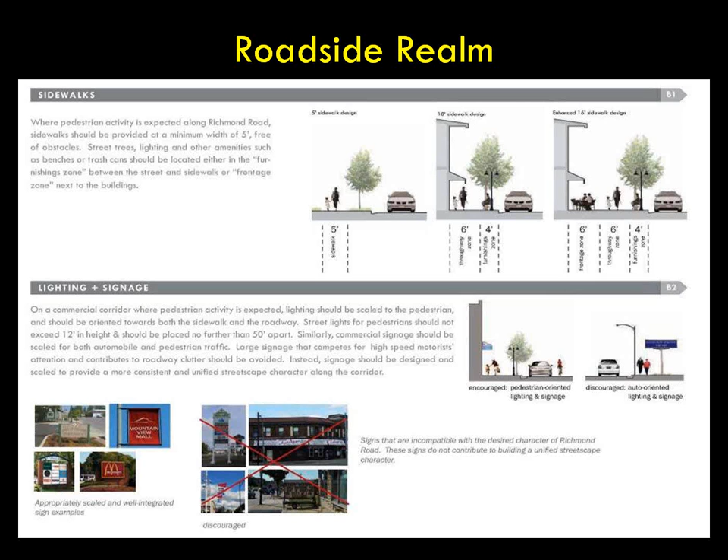Then looking inward a little bit at the roadside realm, the pedestrian environment. In this corridor, in some cases pedestrians are not supposed to be on the corridor and they're pulled off it. In other places, we deliberately put the pedestrians right on the corridor. So transitioning from one place to another was important to understand.

We also have guidelines here from that coordinated, context-sensitive solutions approach that includes engineering and architecture guidance about how to design an inviting street wall that's appropriate to the kind of pedestrian activity you want to create, whether it's oriented towards the street or towards the local network off the street.

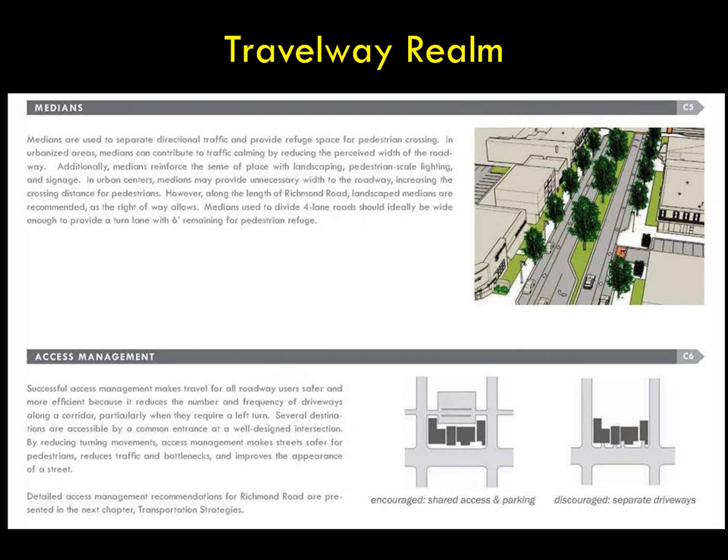Then finally, what they call the travelway realm, which is what most people think of when designing a roadway or street segment, is what happens between the curbs. Here we look at where you want to put in medians and elements that provide community character enhancements but also practical resources like pedestrian refuge areas, splitting up a wide intersection crossing, and putting in room for transit and cyclists.

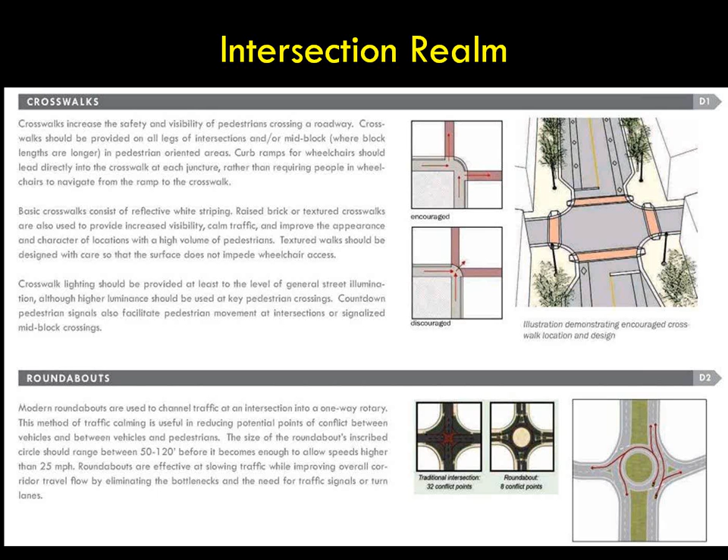So we're just about at the conclusion of what we're presenting today. We've shared an awful lot of information with you, and I hope it's been helpful. I just wanted to close with reminding ourselves what our job is when we are making transportation systems that foster livable communities. We are creating transportation systems that provide the connections the community needs to survive.

We're providing transportation systems that provide the connections people need in order to thrive. We're providing transportation connections that allow every person to achieve the purpose of every trip. And we're providing connections that allow people to travel safely, conveniently, comfortably, and affordably, both today and for generations to come. It's perhaps a tall order, and sometimes you might wonder if we can do it.

I just wanted to provide an inspirational message about the concept of whether it's impossible. As you may know, according to all known laws of aviation, the bee should not be able to fly because its wings are too small to get its fat little body off the ground. But the bee, of course, flies anyway. This is because bees don't care what humans think is impossible.

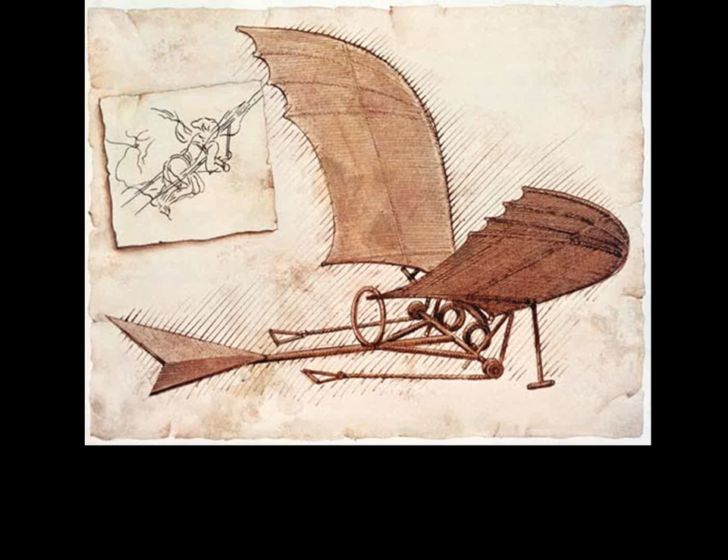I learned that great piece of science from the Bee Movie, of course. But I just wanted to remind us that it's our job to make communities in which people can soar and fly, and I would challenge us all to fly whether or not you think you can. And I would close with that and turn it back over to Glenn.